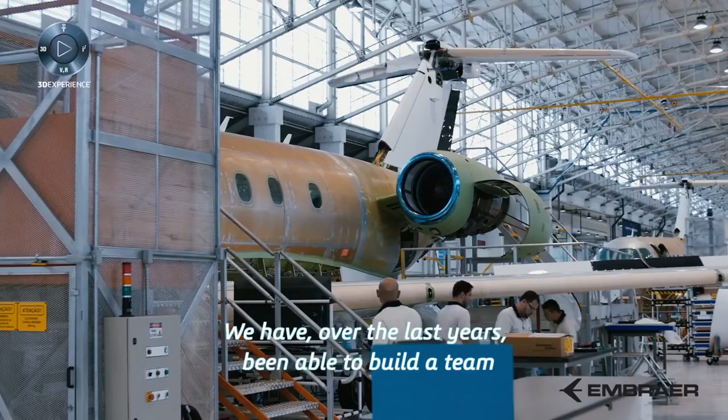Embraer is a company that is constantly evolving in its creation. Our customers are mostly in the aerospace and defense market, from commercial aviation, business aviation, and defense. Over the last years, we've been able to build a team that can well understand the customer needs and translate it into products and services.

The company is growing from a small company in Brazil many years ago to a big exporter from Brazil, to a truly global company. We are one of the 4 big commercial airplane manufacturers.

The biggest challenge that we see in terms of driving innovation and technology throughout the company is about developing the right collaboration projects, the right co-creation projects, the right cooperations, not only in Brazil but in many different places as well. The aerospace industry is really a complex environment.

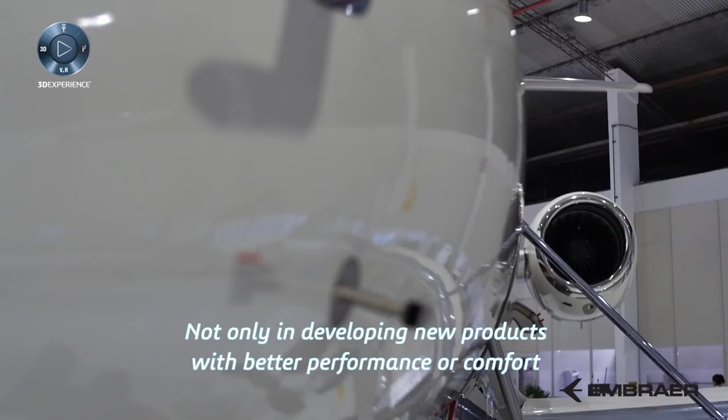Not only because the product itself is complex, but all the value chain, supplier basis, and operation. That's where technology can help us, not only to develop new products with better performance or comfort, but also to improve systems.

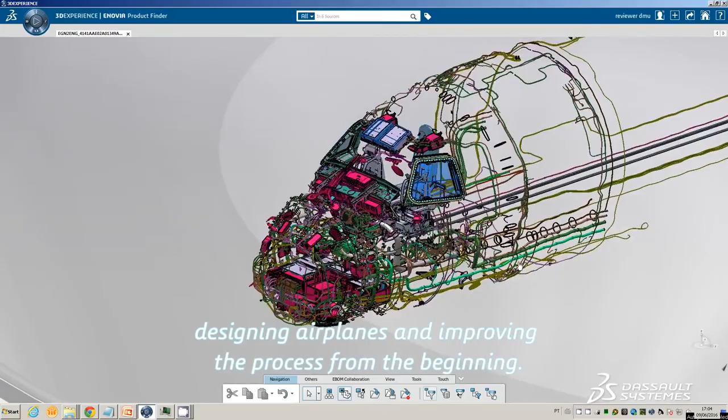We started working with Dassault Systèmes back in 1997, and since then we've been developing together a way to design airplanes and improve the process from the beginning. Today we have this 3D system designed and used by 4,000 employees, from pre-design to services.

With the 3D, we can eliminate some intermediate languages, steps and documentation, which improves the process, not only saving some time, but the communication is better.

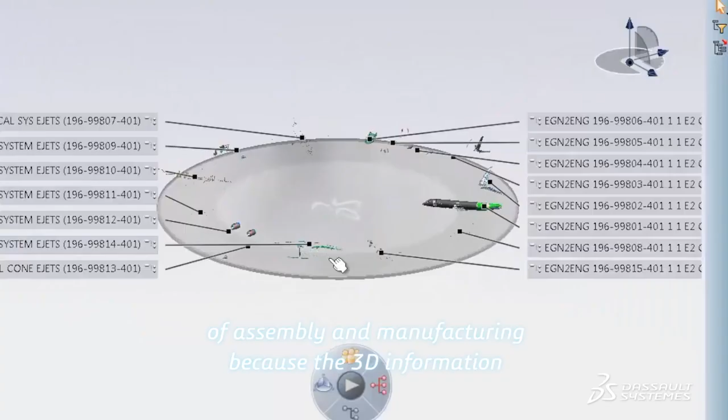The 3D experience allows a better understanding of all the process of assembly and manufacturing, because the 3D information is electronically available to the workers, so they well understand the scenario. It simplifies the manufacturing process.

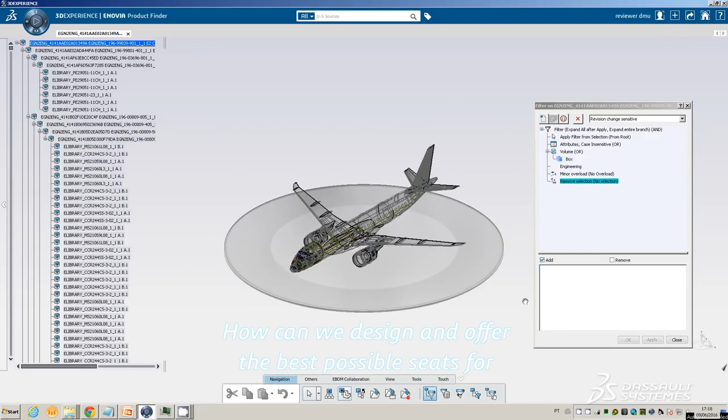The passenger experience is really important because there's a great focus here on executive jet interiors. We want to have a better grip on the technology, on the manufacturing processes, on the cost, on flexibility. How can we design and offer the best possible seats for our business jet customers?

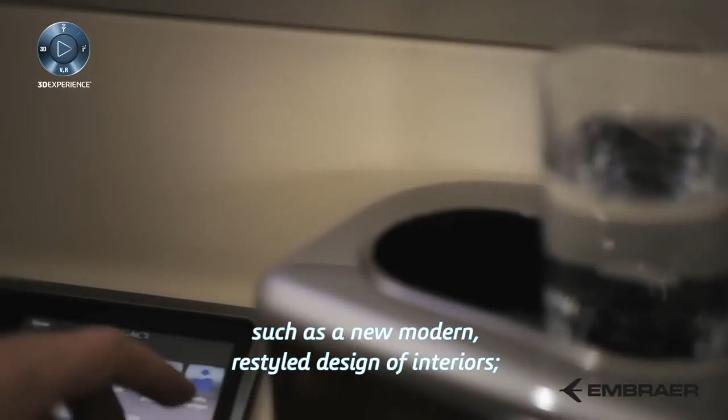We extensively use the 3D system in our constant process of introducing new technologies to improve our products. We have in the Legacy 500 a real example of all these things together, such as a new modern restyled design of the interior, the fly-by-wire system which enables pilots to control and manage the airplane better, as well as the entirely new avionics.

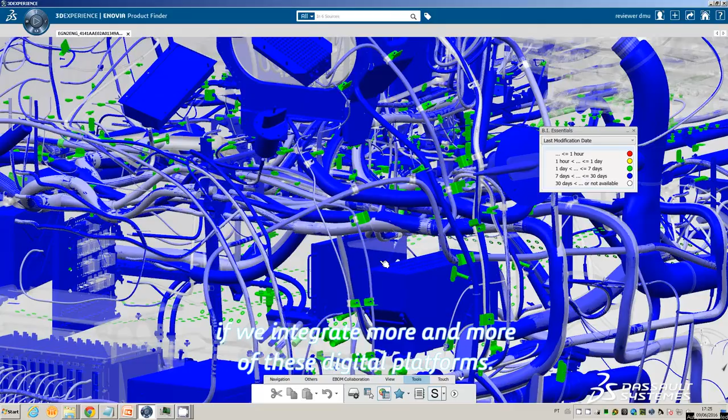There's a tremendous opportunity to bring more intelligence to our customers' operations on a day-to-day basis if we integrate more and more these digital platforms. We do believe that by using the 3D experience platform, we can better integrate people and ideas.